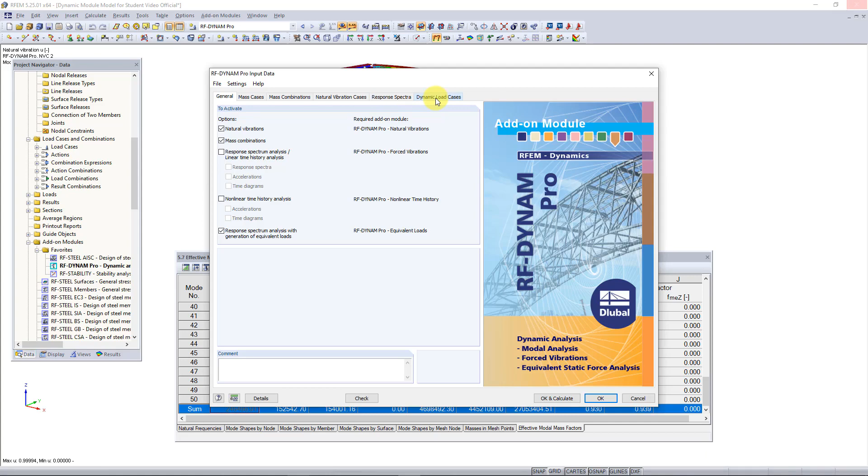So now we can go back into the RF-DYNAM Pro add-on module. And we can activate the add-on module response spectrum analysis with generation of equivalent loads. So with this, once I activate it, you'll see that at the top here, we will get two new tabs. One is for the response spectra we need to generate based off the standard, and the other one is to generate our dynamic load cases and create our equivalent loads. So let's first go into the response spectra tab.

And this is where we want to generate our response spectra, and you can see that we can do this according to a standard. Right now you can see we have a long list of standards. So the first thing we need to do is select the standard we would like to generate this response spectra from. So I'll choose the ASCE 7-16 for this example, but you can choose from any of the other standards as well.

So you can also see we have the choice to create these parameters based on user-defined info. So we can choose this option if you would like to just enter your acceleration and period manually, like this. Now we just need to enter our parameters with regards to the location of the structure. And so what we can do is use the GeoZone tool on our website to find these parameters. I already did this, and I assume that the structure is located in Philadelphia, Pennsylvania, in the United States. The ground motion parameters we need to enter here are what we recorded from the GeoZone tool.

So we need to enter the site class, and this is determined from the standard. Then we need to enter the response acceleration parameter for short periods, which in our case, for this location, is 20% of g. Then we need to enter the response acceleration parameter for 1 second periods, which is 6% for this location. And then the last parameter we need to enter is the long period transitional period, T sub L, and for this location is 6 seconds. And then the rest of these parameters will all be generated automatically.

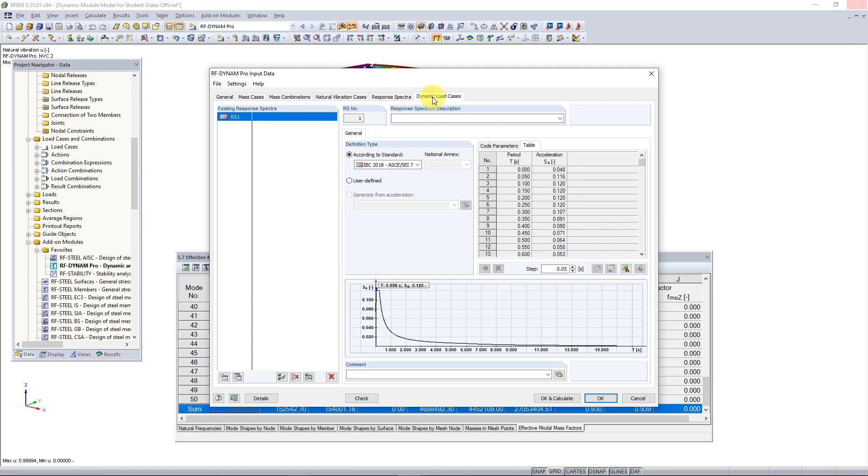So here you'll notice that the only option given to me under this tab is the equivalent static force analysis. And this is because I only activated this dynamic module under the general tab. All of these other options have more to do with other add-on modules like time history, for example. We do also need to solve for our one natural vibrations case, which we have automatically selected here.

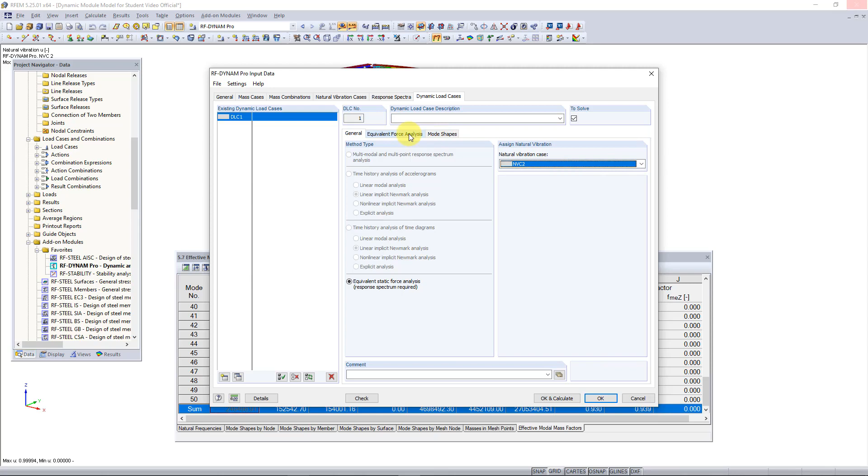And then the next thing we need to do is go under the equivalent force analysis tab here to tell the program which directions we would need to excite the structure, for example. For this video, I'm only concerned with the two orthogonal directions x and y, so I will activate those.

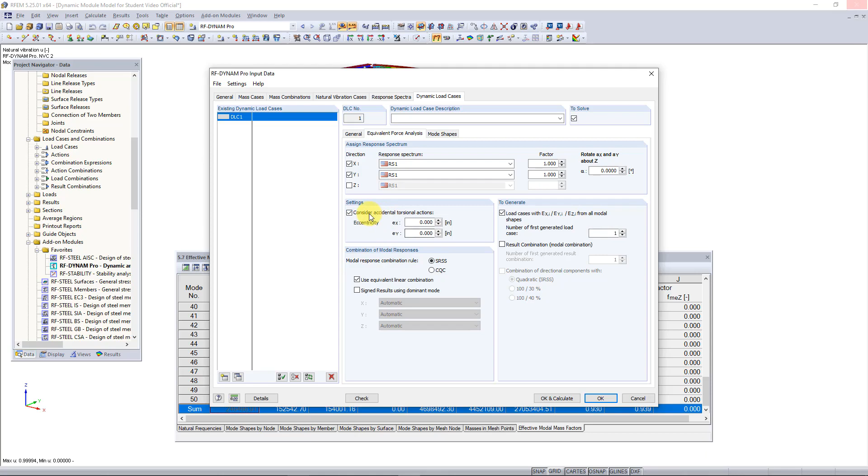If I was concerned, again, with vertical seismic, then of course I would activate z as well. The next info we need to enter according to the ASCE 7-16 is the eccentricities for accidental torsion. And how we do this is we set 5% of the structure's dimensions perpendicular to the direction of the applied forces. So if I activate this in the x direction, we just need to choose 5% of the total length in the x direction of the structure. And I already calculated this value and it came out to be 16.56 inches in the x direction, the global x direction.

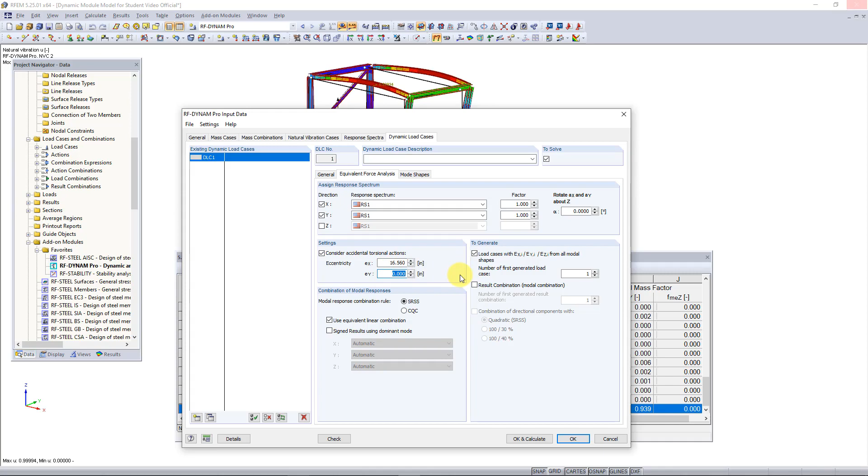And then now in a similar manner, we need to have the eccentricity in the y, and we can compare that to the direction in the y of the short direction of our structure, and 5% of that dimension is 12 inches. So we can enter that. And now the program's smart enough to know to multiply the forces in the x and y directions to these eccentricities to create our accidental torsion.

Now what we need to do is choose the combination rule for our modal responses. This is how the program combines all of the load cases created from the equivalent seismic forces in each direction into an envelope solution. So there's the two options here, the square root sum of the square, or SRSS rule, or the complete quadratic combination rule, or the CQC rule. The main difference between these two rules, just to sum them up quickly, is that the SRSS rule does not take damping into consideration, whereas the CQC rule does take damping into consideration. For this tutorial, we can set the rule to the CQC rule, just so we can see how damping works, and you can then see that this activates the damping tab up at the top here.

We then can also activate our load cases over on the right here, so they're already automatically activated, and then we need to also activate our result combinations, which is where the load cases will be combined according to our modal response combination rule. And then lastly, we need to activate the 100/30 rule according to the ASCE 7-16, telling us that we have to have a result combination that combines 100% of the forces in the x plus 30% of the forces in the y. And then this will also do the reverse and do 100% of the y and 30% of the x forces, creating two result combinations.

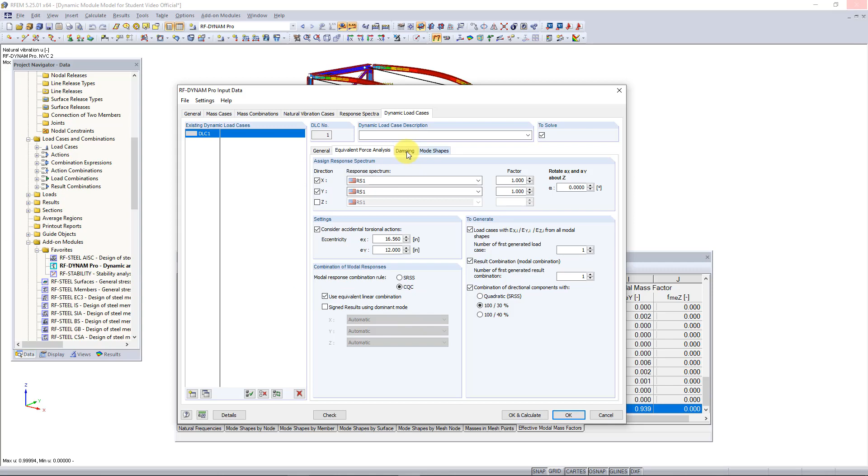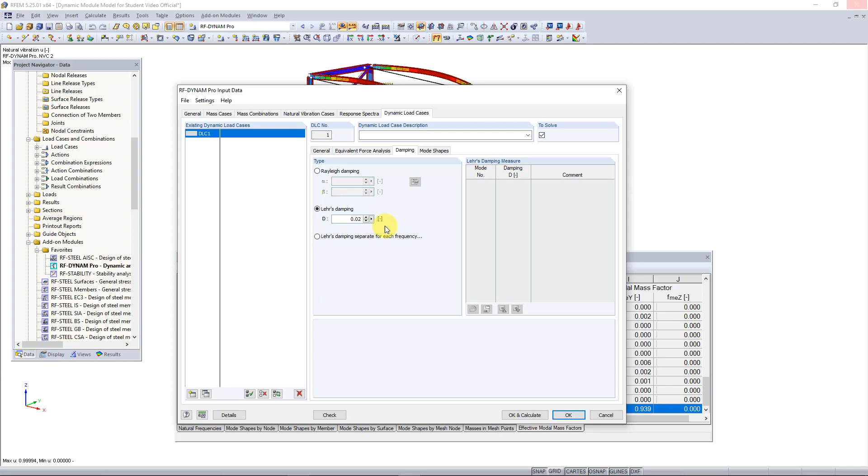So then we can move on to the damping tab. And like I said before, if you use the CQC rule, then you have to consider damping, or else there isn't much difference between the CQC and SRSS rules. So in this tab, you can either enter Rayleigh damping coefficients, or we can use the Lehr's damping, which is, for example, around maybe 0.02 for a steel structure. So we will just assume this value for this example.

Now in the last tab, mode shapes, the program wants to use all calculated eigenvalues to create equivalent loads. This really isn't necessary in this case because we just want to use 90% of the structure's mass participation. So what we can do is, instead of selecting all of our equivalent loads here, we can choose this option, deselect modes with, and we can enter the value 0.005 or 0.5%. And so what this will do is it will deselect all mode shapes that have less than 0.5% mass participation. And this basically will help us with reducing our results and just creating a cleaner analysis. And you can still see here, even with deselecting those modes, that we were meeting our 90% mass participation in both the X and Y directions.

So the last thing we need to do now is just hit OK and calculate. And so this is the end of this video, and in the next one, I will go through these results and explain how to view and understand them.